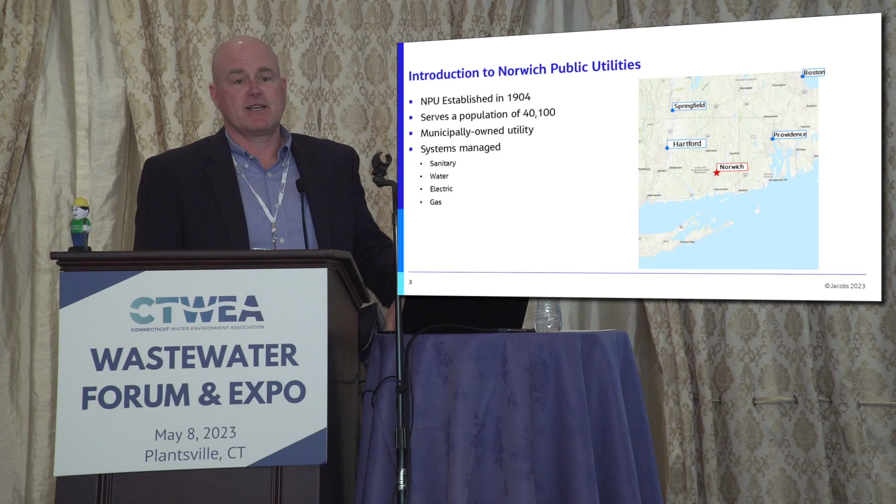Murphy. Norwich Public Utilities. We've had a lot of pipe breaks, force mains and gravity mains recently. Agenda: introduction to Norwich Public Utilities, if you don't know about it, some of the challenges in our collection system, rehab projects, and lessons learned. Norwich Public Utilities, Southeastern Connecticut, established in 1904, just a little over a population of 40,000. We have all 4 utilities, water, gas, electric, and sewer, which makes it great for utility breaks. It's easy to coordinate, so that's a big advantage for us.

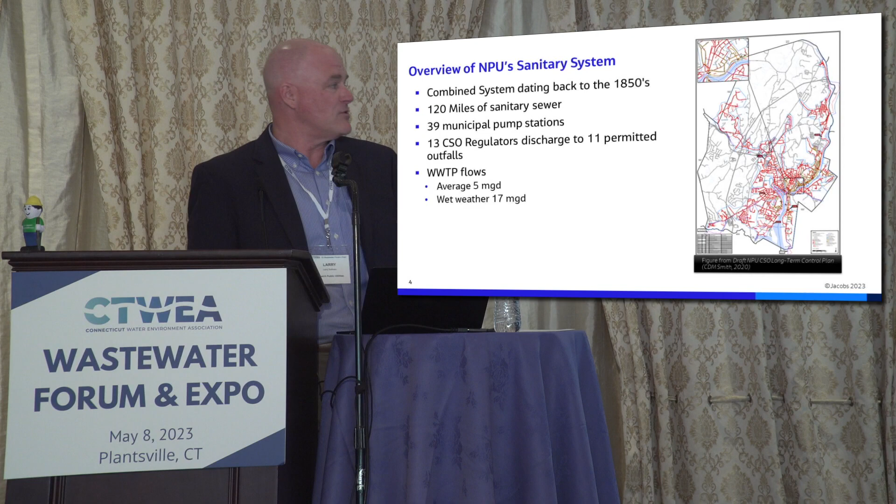Our system, there's a map on the side. It's a little small, but it's roughly 1850s, some of the earliest records we have, a lot of 1880s, early 1900s, clay, brick, concrete pipe, 120 miles of sewer, 39 pump stations, about to get 40, which is wonderful to have. 13 regulators down to 11 CSO discharges. We have closed off 3 in the last 3 years after the flow monitoring showed they're really never going off. Our 1 wastewater treatment plant is in, I don't have the clicker, in the middle. We're about to go under a significant renovation to that plant, which is long overdue. But right now, its average is about 5 MGD, and we can take 17 safely during wet weather flows.

So some of the recent challenges we've had with a system at our age, and I think anywhere through New England, we've had CSO force main failures, gravity main failures, like I said, a lot of I&I, some deferred maintenance from sins of the past, and a lot of the failures. If you can see the bottom right-hand picture, you can see that V-notch in the bottom. That's the cast iron pipe from 1973. When you pump that much grit and the stations turn on and off, it's basically a sawtooth on the bottom. It's a bottomless pipe, looks like a slit, and it's sharp as a razor blade, and that kept us fairly busy. And again, nothing's outside of what anybody else has actually experienced in New England.

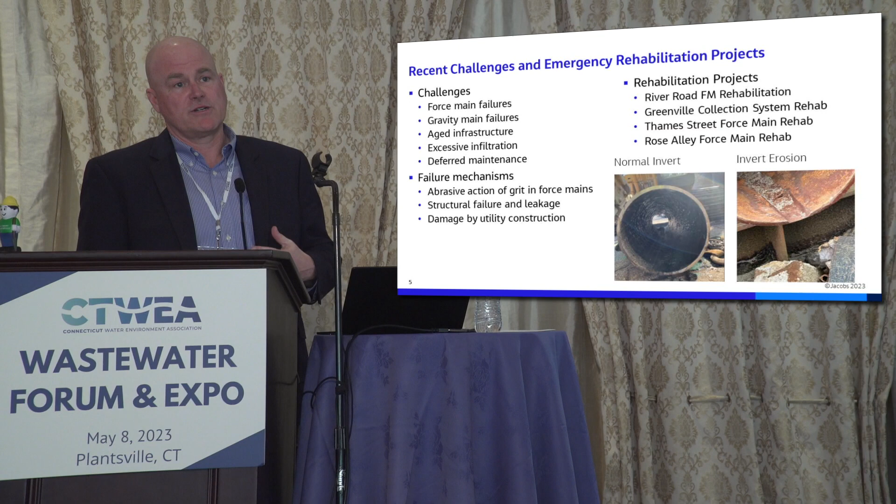So we've had 4 main rehab projects going on recently. We've had 3 major force mains. One has been repaired, 2 in the process of repairing. We have them bypassed, and an ongoing rehab project in one of the oldest sections of our town called Greenville. It leads to 5 CSOs. So with the actual details of all the projects, I'm going to defer to Andrea.

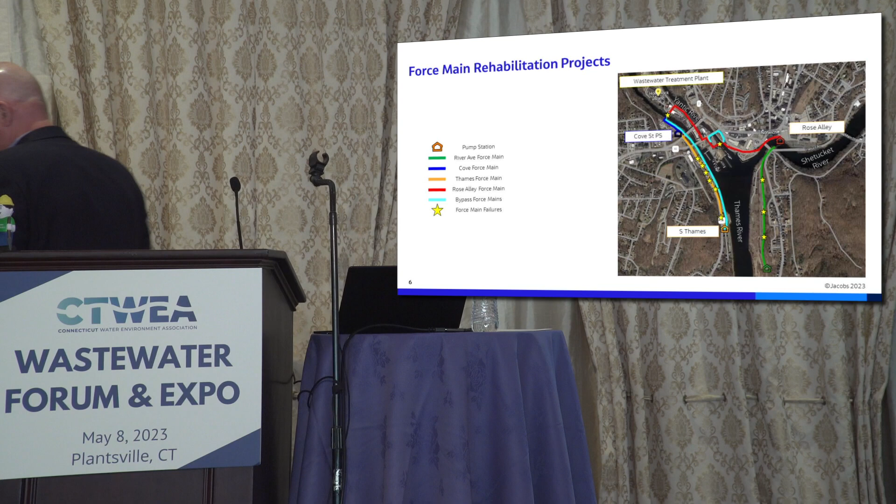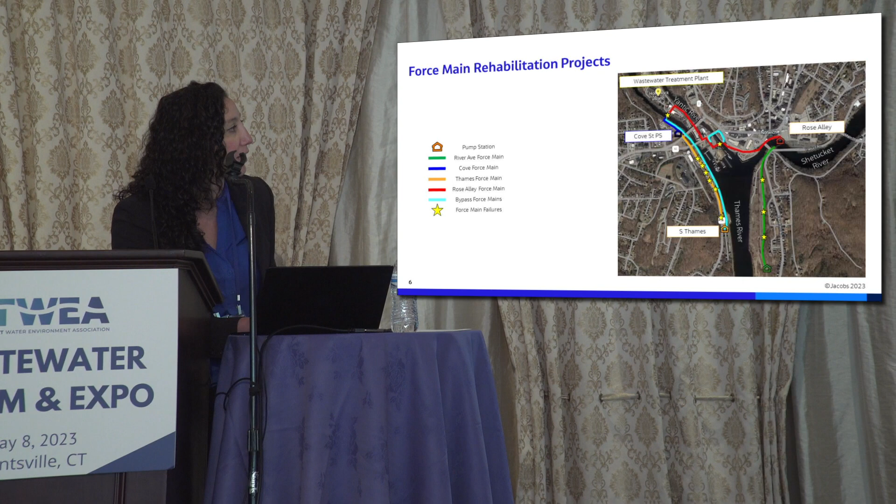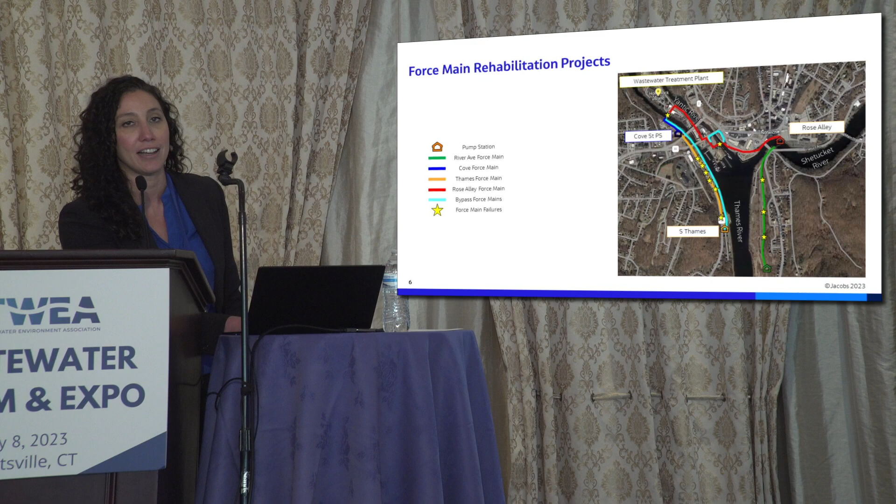All right, thanks, Larry. We're going to talk about 4 of these projects. Actually, let's go over an overview. Let's see if you can see my cursor. No, great. So we're going to start here with South Thames Street. We've got a pump station here, pumps flows up to Cove and combine over across the river into the wastewater treatment plant that's right over here on Hollyhock Island. Down here, we've got the River Ave pump station going up the force main to the Rose Alley pump station, and then across over again into this island where we have the wastewater treatment plant. So we're going to step through these.

So the River Ave force main, about 2,800 linear feet of 14-inch cast iron force main. Again, old aging infrastructure, 45 years old. Multiple previous repairs along this force main and failed leaks to the surface. As Larry had mentioned, invert erosion being the main cause of failures.

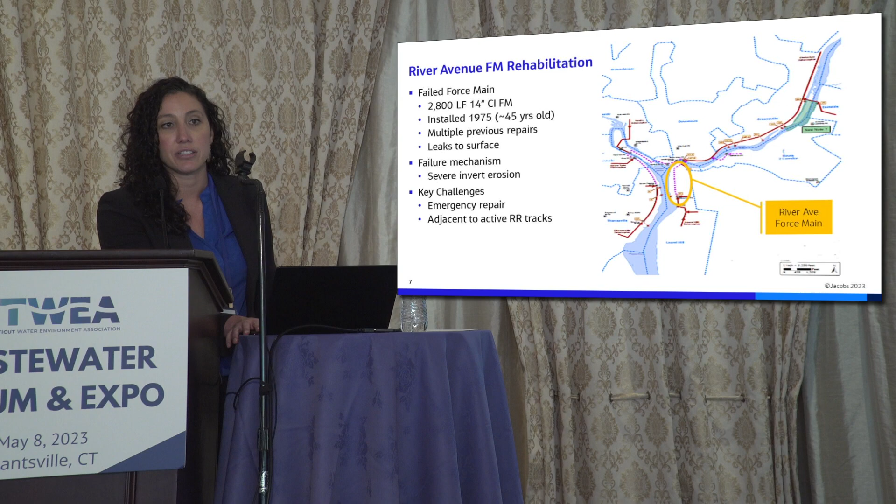That was what happened here at the River Ave force main. And the key challenges with this one, it was an emergency repair adjacent to active railroad tracks. So we've got some photos here, but our scope of work is really similar with all of these emergency force main projects. First and foremost, dealing with the emergency. So preliminary site visits, assessing the situation, where's the break happen, how can we get it under control.

Installation of bypass system, and NPU's crew is great about going and responding to these and getting it under control, at least getting the immediate leaks addressed, so that we can have some time to move forward through design and construction. Evaluation of alternative rehab methods, and then preparation of plans, specs, and bid documents and construction phase services.

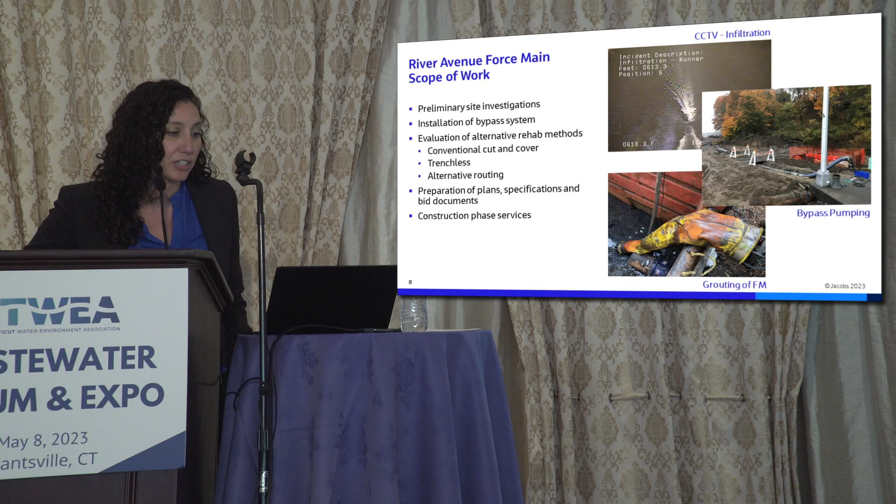So over here, we've got the CCTV in the upper picture here, and you can see the infiltration coming in from the invert where we've got holes because of the extreme invert erosion there. We've got the bypass pumping that NPU put in place so that we could evaluate the system. And then there's actually a photo there of the grouting of the force main in progress at the invert there.

So after the evaluation of alternatives for dealing with this emergency, we selected pressure-rated cured-in-place pipe, CIPP. It maintains a similar hydraulic performance. Yes, the reduced inside diameter, but also we've got a lot smoother flow going through the pipe. It's quick and minimized impacts to the railroad property so that we could get in and out through that process relatively quickly.

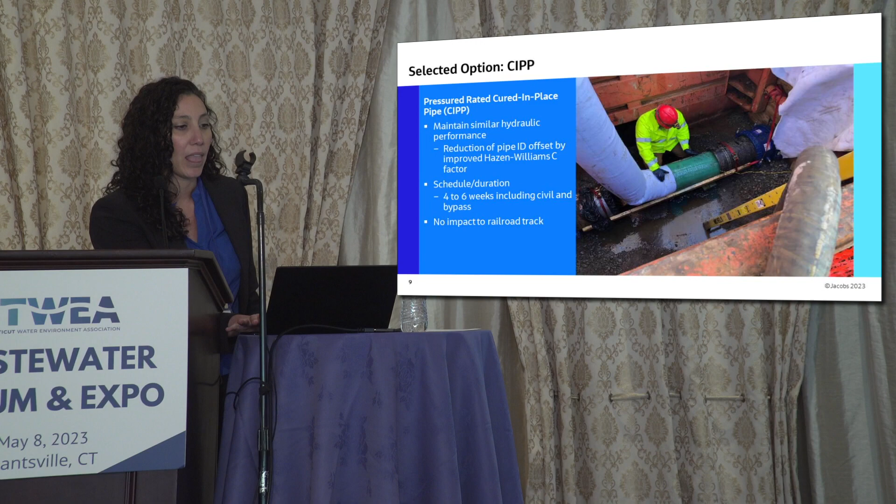So you can see the before and after lining, and you can really see how smooth flow can go through there and the improved hydraulic capacity. But it was emergency restoration of the 14-inch force main by CIP. Avoided the need to excavate along the railroad. We know that there's a lot of delays that can happen getting the permits to do that work, so CIP was the best way to go.

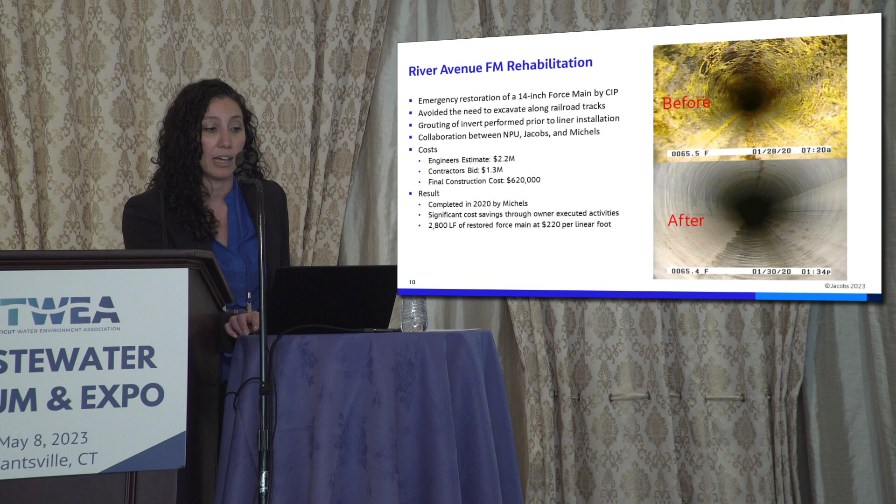Grouting of the invert, like I showed in the previous picture, so that we could get the liner installed. And then collaboration between Jacobs, NPU, and Michels, which is the general contractor selected for the job. Engineer's estimate was 2.2, contractor's bid was 1.3, and then it actually got done a lot cheaper than that, and that's really because NPU was able to do a lot of the earthwork, the bypass pumping, all of that on their own with their crews, so that saved a lot of money on that end.

So Greenville, Larry mentioned this project. This was actually proactive. This area really had a high infiltration. It was a high priority area, so what can we do to rehab the pipes in this system? Fully developed residential neighborhood, about 12,000 linear feet of gravity sewer, all those pipe types, but mostly clay, 100 manholes, and again, aging infrastructure in New England, 1800s, so a lot of old pipes.

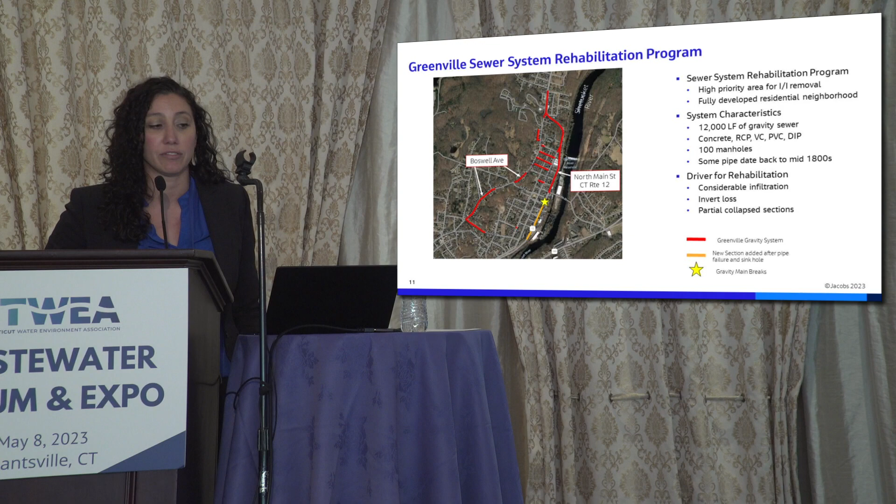So it was really first to go in and take a look at these pipes and then determine what the best course of action is for rehabbing the pipes. Drivers for the rehab, like I mentioned, infiltration, invert loss, and then there were partial collapse sections, as we'll see in the CCTV.

Let's see if I can get my cursor back. Does anyone know what this is inside the pipe? Scream it out. It's a camera, CCTV camera. Fell in through a big hole in the pipe. So there's an issue there that needs to be addressed. So the first thing was to go CCTV and see what the problems were.

That's certainly a problem. A lot of old infrastructure, like I said, right here, the picture right next to it. Can't see it that well on the screen, but it's a lamp hole. So fixing those where we could with manholes. Down in the bottom picture, I don't know where my cursor went. There we go. Any ideas what this is? Another pipe, another pipe going through the sanitary pipe. So something we want to fix there. And then, yeah, just the general condition of another pipe segment that was in disrepair there.

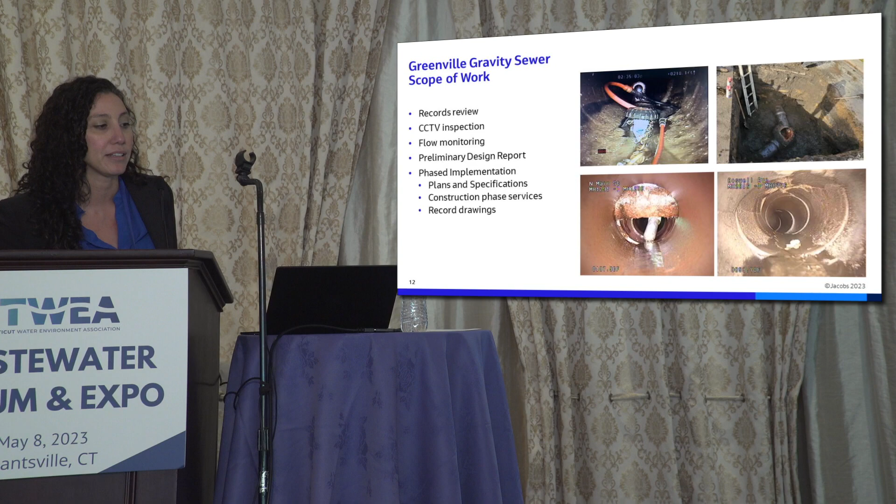So we did a records review, CCTV, flow monitoring, put it all in the design report, and then really phasing implementation of fixes, so plans, specs, phased construction services, and then updating our record drawings. So phase 1 is completed. We did the CIP for high priority segments that could be lined, kind of focusing a big lining contract on that. A little over 6,000 linear feet between 8 and 15 inches in diameter, completed in 2021 by Aegion, at a 57 per linear foot cost.

I believe phase 2 is out to bid right now and includes 5 new manholes, 140 linear feet of pipe repair, a little over 3,600 linear feet of CIP, and then also some new pipe replacement as well. So really stepping through the Greenville sewer shed to proactively maintain these systems before they become the emergency situation.

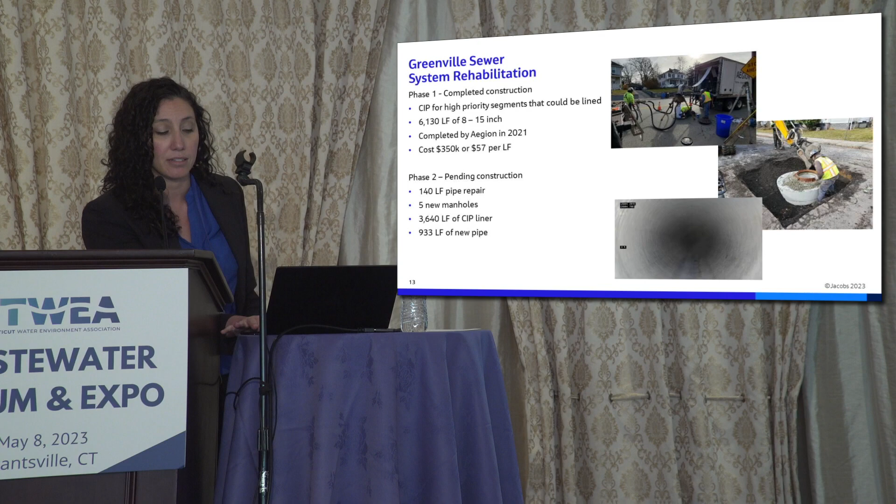So Thames Street Force Main, the last 2 projects are on either side of the river here. South Thames Street pump station pumps up, and you can see all those pretty yellow stars where we had major issues, then failures. It goes up to Cove Street, and then under the railroad track, over the river, and to the treatment plant it goes.

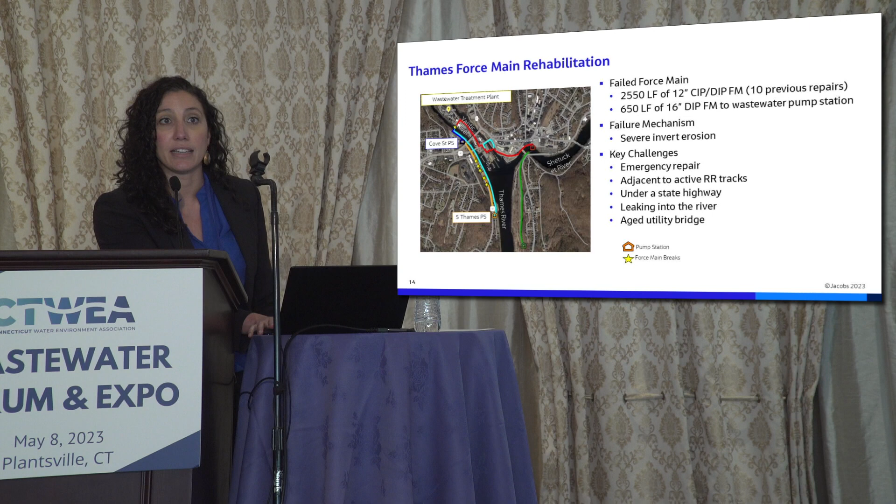Emergency repair, like we said, this was a really challenging and continues to be a challenging location. Active railroad tracks under a state highway that was just recently paved, so we didn't want to do any work in the highway that was going to make us have to redo the entire roadway. Initially, the issue was leaking into the river, and then aged utility bridge that's taking it to the plant.

So about 2,500 linear feet of 12-inch force main, 650 linear feet of 16-inch force main, and again, it was an emergency situation, multiple breaks along the Thames Street force main, and then also a break along the branch that goes to the river. So again, the big part was how do we get the system under control right from the beginning.

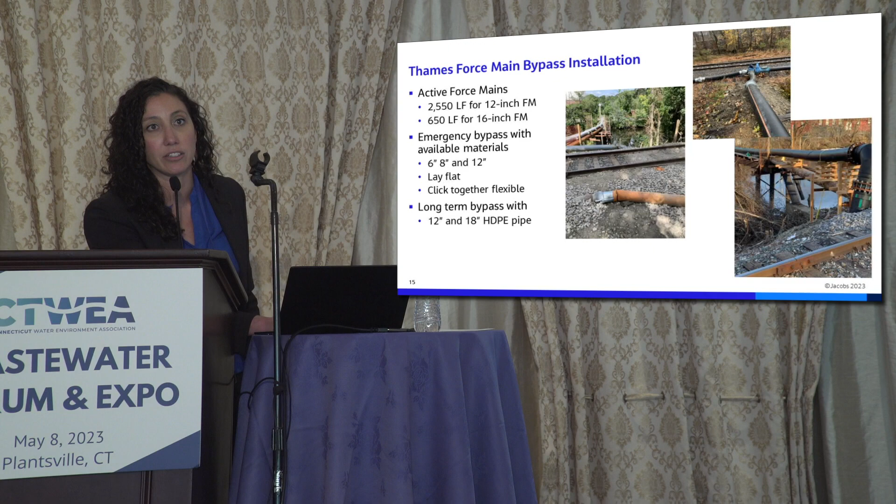NPU got their team out there, pieced what they could together with available materials, and got a temporary bypass in place to mitigate the initial discharge into the river. And then after we had that handled, getting in and getting larger material in so that we could have a longer term bypass as we designed the system.

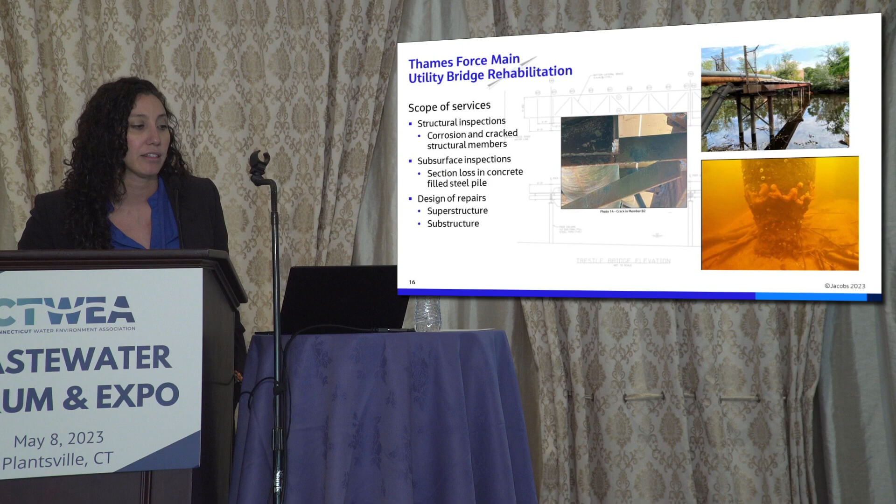I mentioned the utility bridge, again, aging infrastructure and the issues associated with that. We did an inspection of the bridge since we were gonna have to be working with the pipes over it. Superstructure evaluation and substructure evaluation, you can see the cracked members in the utility bridge that are holding our force main in place, as well as severe deterioration of the piles underneath. So we worked into this design of repairs for the utility bridge as well.

So initially we had thought, let's get rid of that infrastructure, let's put in something new, and then fill the annular space in with concrete. It'll be nice and sound, and we'll all be able to go on our way. But really, this is a really old casing, and the question was, okay, if we touch it, we own it. And then there's also the fact that we needed to get it permitted through the railroad, and they had to be okay with everything that we were doing in their casing. And if we touched it, would they make us redo the whole thing?

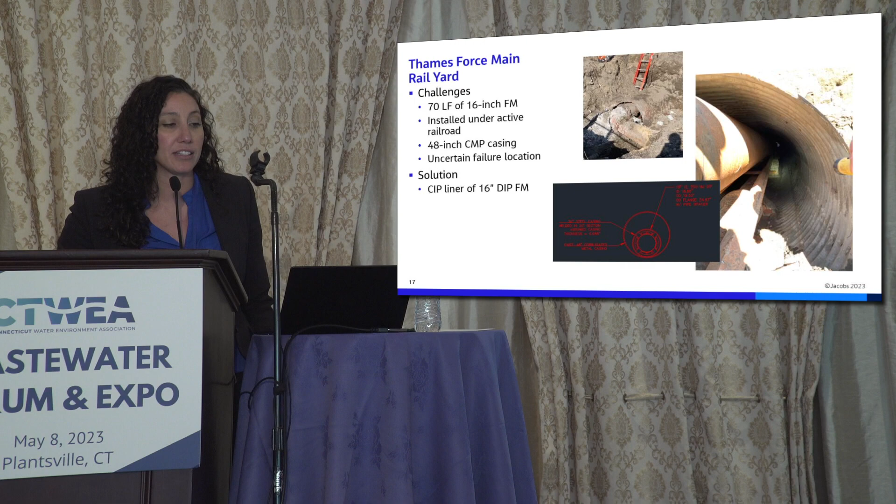So there was a bit of a risk associated with that, and we decided let's not touch it, and let's just line that segment underneath. We know that there was a break somewhere in there, and were able to CCTV it and check it out. But really, the solution ended up being let's line that segment and maintain the system in place as is.

And then replacing segments that need to be replaced on either side, over the bridge and right before the bridge between the Cove Street pump station and the railroad. And then doing the bridge repairs to that utility bridge to make sure that there's safe conveyance of flow to the wastewater treatment plant.

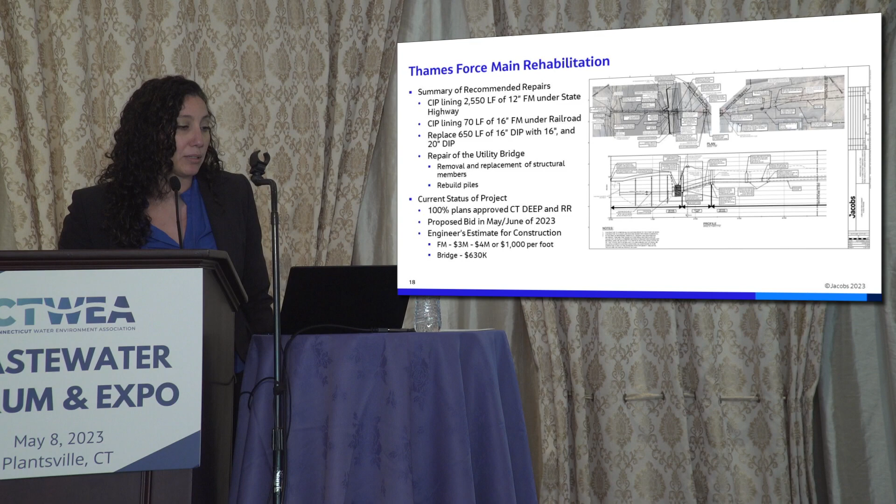So the status of these projects are, the plans are done, approved by DEEP and the railroad. We're hoping to go to bid soon. We're just finishing up things to figure out our SRF funding for the project. And right now it's looking like a $3 to $4 million project, plus the bridge construction as well.

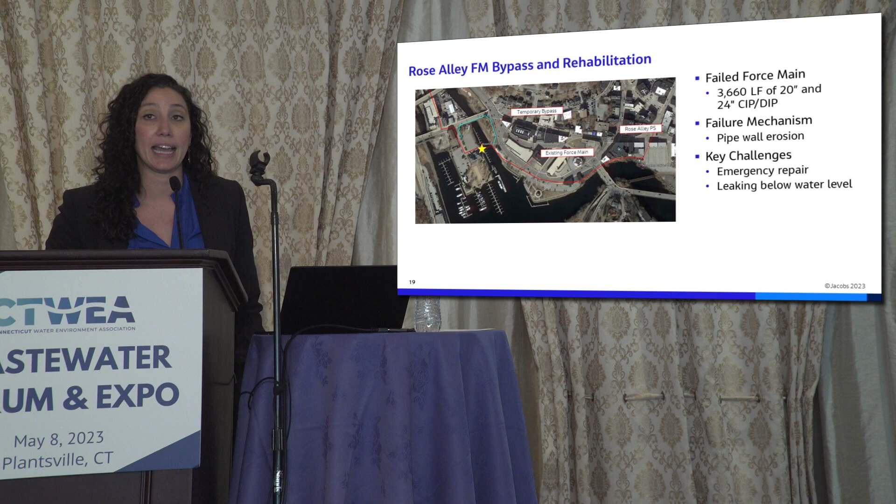And the last project I'll talk about is Rose Alley. Again, another failed force main, 3,600 linear feet, 20-inch, that goes to 24-inch. Pipe wall erosion was the failure mechanism in this case. Again, emergency repair. It was leaking to the river below the water line. So we were brought in to support getting a bypass installed as quickly as possible.

Again, there was kind of a temporary bypass that was put in place to alleviate the initial discharge into the river, and then supporting the design of a more permanent temporary bypass over the DOT bridge and back into the parking lot here.

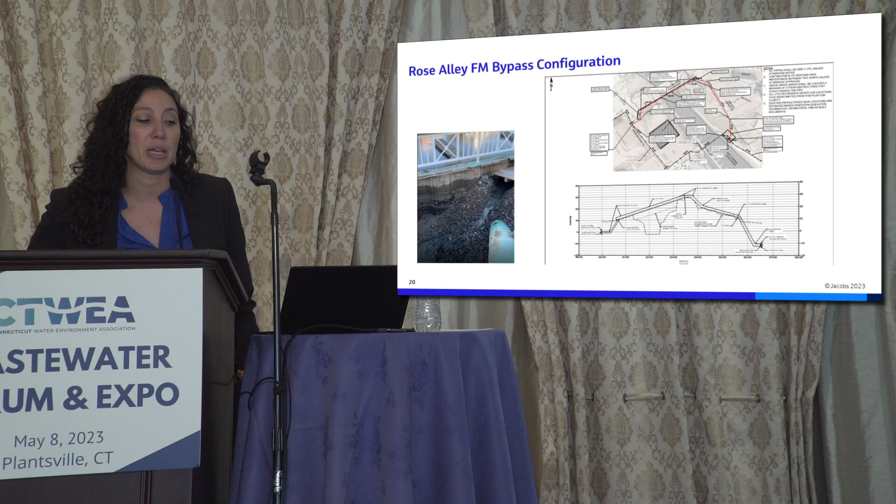So the failure is actually on this side of the river, so we stopped it before and we're going over the DOT bridge, so we had to do some permitting with DOT to be able to use their sidewalk to convey that bypass around and onto the island. We had a little bit of a delay because this is at the marina last summer, and there was, I think, a ceremony or something happening there, so we had to put a little pin in it for a little while.

We had the bypass in place, everything was being safely conveyed, and then we got back into it this fall to figure out where the leak is in the underwater section so that we could then propose a fix. So for this one, we CCTV'd, but it was underwater, so we needed a way to kind of dewater it in order to be able to see where the issue was. So we did camera inspection, a foam pig to dewater up to the leak, and then a camera was kind of tethered behind that pig.

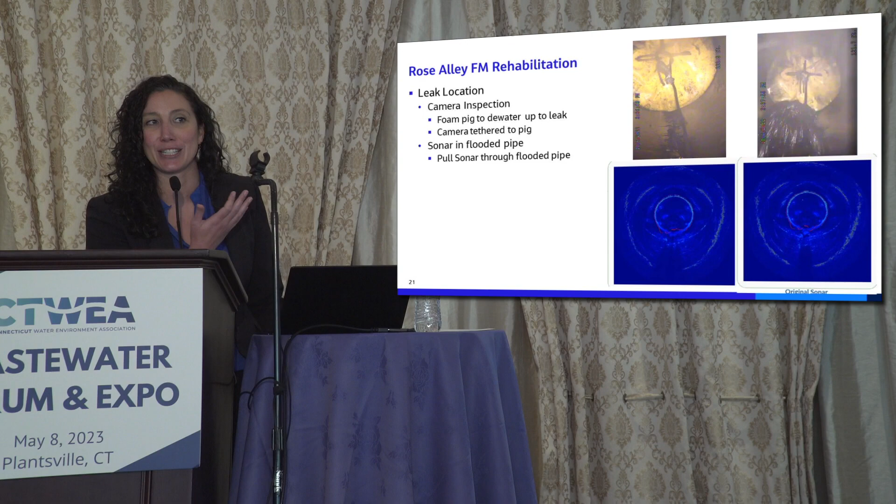We also did sonar of the flooded pipe to see if we could see the invert hole at that location too. Others say that they can read these. This looks like not a lot to me, but over here some people can see that there's a hole right there. It's going to be hard to see on the screen. Bill Cotter can come up and show you where the hole is if you want. But the CCTV actually proved to be a lot easier for us to really see where that hole was in order to design the fix for that.

So our recommendations for this: install an internal repair sleeve right at that hole, and then go ahead and line that segment under the river. Once we are able to block the hole and dewater the system, we can get the CIP lining in. Status of this project is the bypass is still in place. We've completed the condition assessment to be able to know where the hole is and develop plans to fix it.

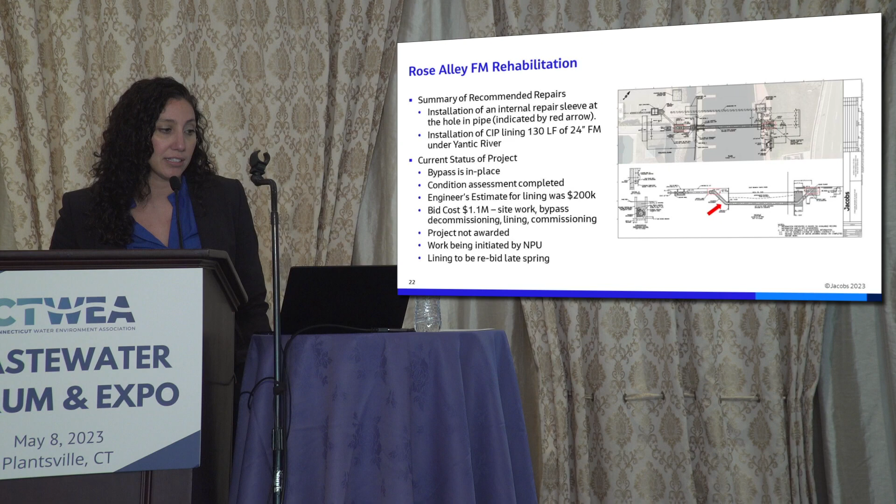Our engineer's estimate was about $200K just for the lining portion, but when you bring in the general contractor aspect of the earthwork on either side to open up the pit, dewatering, removal of the bypass, the one bid that came in was significantly higher than anticipated at $1.1 million for site work and bypass decommissioning, lining, commissioning. It wasn't doable with what we have, so it was not awarded. NPU is going to take the helm and do a lot of the site work, and then we're going to get that repair sleeve installed, and then hope to be rebidding just for the lining portion in late spring.

So through these projects, we've learned a lot. The failure mechanisms with the CSO system: a lot of grit in the system causes the erosion that we're seeing at the invert. There's been a lot of active and repaired leaks in the force mains that we know of, and damage from utility construction like we saw. And then a collaborative approach to rehab. NPU's crew has a lot of capabilities in-house to respond to emergency situations and support repairs as well. So that really helps.

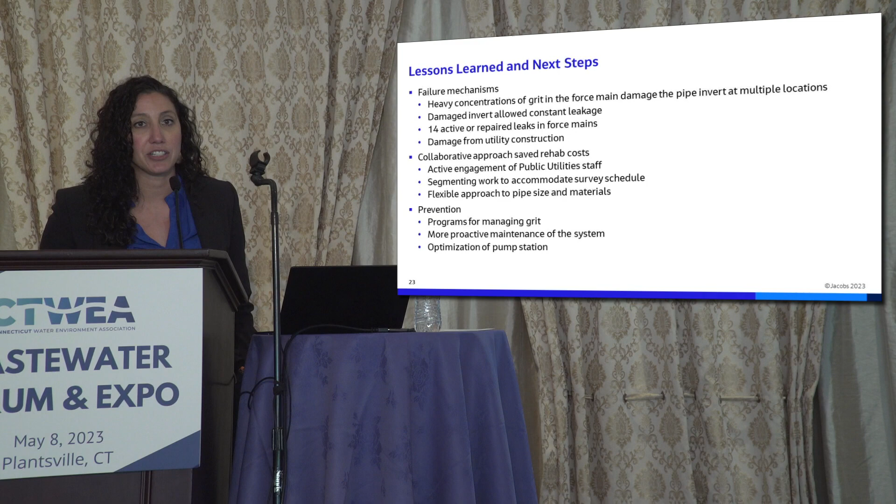And then, when you have an emergency, being able to really jump out there, assess the situation, and put what you can together to resolve the immediate issues with a flexible approach, pipe sizing, materials, whatever you can find, and then get the immediate issue resolved and work forward on a more permanent fix. And then it leads us to the conversation of what can we do about this instead of chasing our tails and always responding in that emergency action. What can we do to look at programs for managing the grit, be more proactive about maintenance of the system, and optimization of pump stations. What can we do at the pump stations to help us mitigate the issues in the system as well?